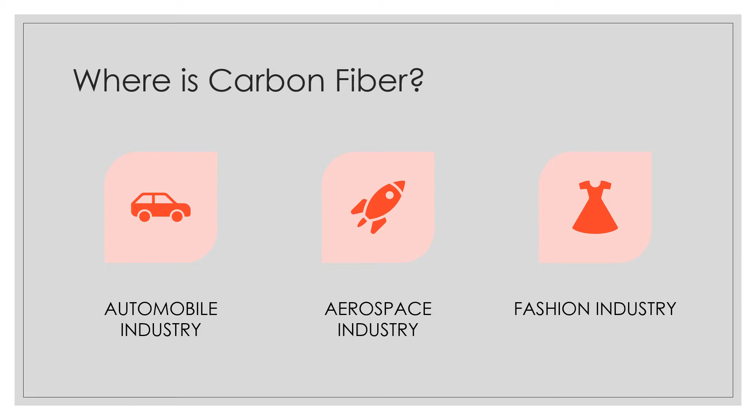Carbon fiber is becoming a major necessity and will continue to grow in value and demand. Knowing more about the creation, economics, and use of carbon fiber is key to understanding the popularity of it. All topics assessed will be important in the upcoming wave of carbon fiber's popularity. Firstly, the history and reasoning behind the use of carbon fiber will be administered.

Shockingly, carbon fiber was first created around 1879 by Thomas Edison, and the reasoning behind the creation of carbon fiber was initially to use the material as a filament in some of his first light bulbs he began to create and experiment with. Although at the time, using it for its tensile strength was not thought of, the fact that it could handle heat and high temperatures very well compared to other materials, as well as its conductivity, made it a point of interest in the future.

It was not really popularized until the 1950s when manufacturers and consumers were looking for a material that could withstand stresses and heat, and ultimately carbon fiber was unmatched at the time. Then the question arose of what was the best way to efficiently and effectively create carbon fiber in order to get it out to the public.

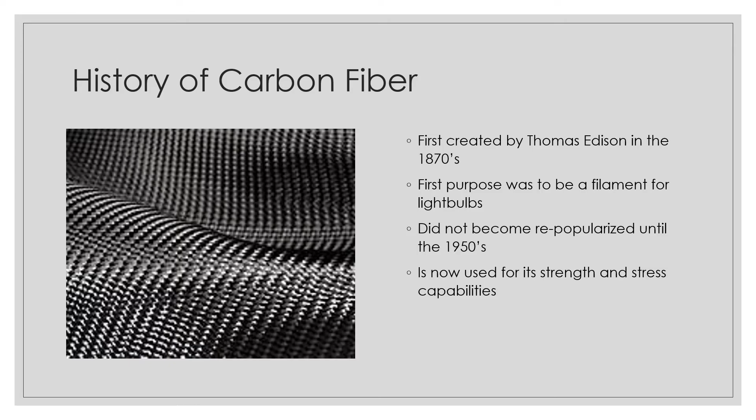To create and produce carbon fiber, thin strands of carbon material are woven together, creating carbon fiber, otherwise known as graphite fiber and/or carbon graphite. Carbon fiber is actually known for strengthening other materials. However, the carbon fibers themselves would have a chemical formula of C–C=C=C–C: C single bond C, double bond C, double bond C, single bond C.

The individual carbon strands are heated together to a high temperature, hot enough to produce vibrations within the individual strands, but not high enough to burn the strands of carbon being heated together. Since carbon fiber would typically melt at 3,652 to 3,697 degrees Celsius, it can withstand the high temperatures needed to separate the carbon atoms without necessarily melting or becoming weak.

The different carbon strands vibrate at violent frequencies to the point where all non-carbon atoms are released, creating a truly all-carbon strand that can further be used to complete the process of creating carbon fiber. After heating and getting all the unwanted atoms out, the strands of pure carbon are then woven together either within different fabric materials or other materials to make the item or object stronger and lasting, depending on the use of the carbon fiber.

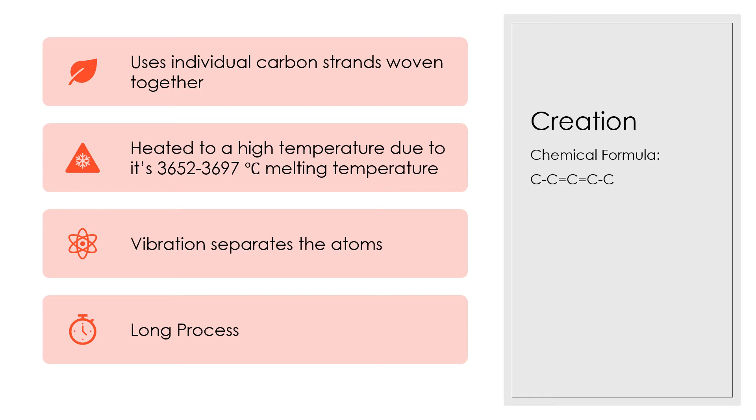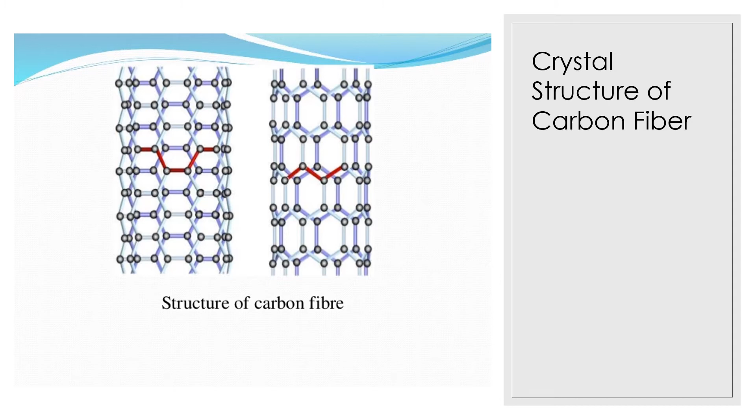Although the process of creating carbon fiber is rather long, this is what drives carbon fiber prices up. Prices also depend on whether the carbon strands are woven in or around another material, which also helps make the carbon fiber stronger. And the strength of carbon fiber is one of its biggest selling points.

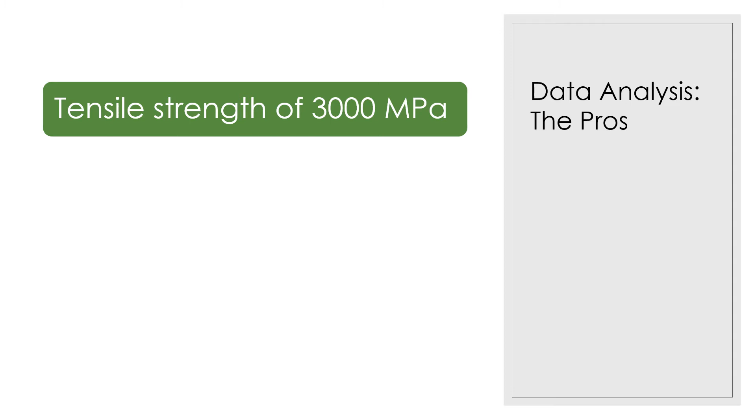One of carbon fiber's biggest selling points and uses is its tensile strength and structure. The way carbon fiber is formed, as explained previously, the carbon strands are strong and the carbon fiber as a whole is even stronger than some metals and steels being used in the current market. Compared to steel, carbon fiber has a tensile strength of 3,000 megapascals, yet the steel is around 1,500 megapascals. And that measure is not even of traditional steels; it is purely carbon-infused steels.

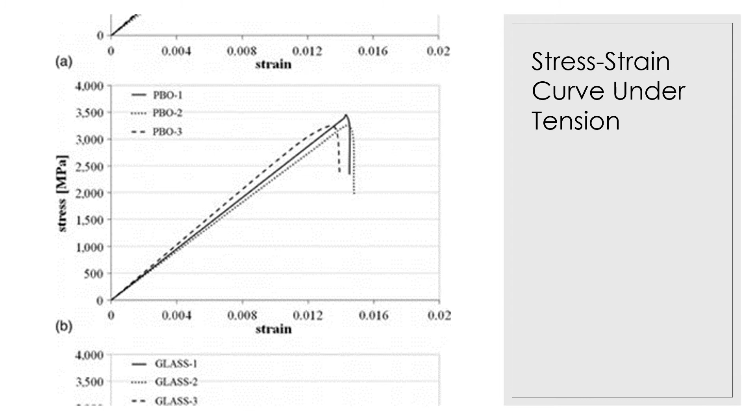The slide currently being viewed is the stress-strain curve under tension. Along with its strength, carbon fiber has a much lower mass than most common metals and steels being used currently in the industry. The density of carbon fiber is 1.5 to 1.7 grams per centimeter cubed, which is almost incomparable to steels with a density of about 7 times that. With a yield strength of 1010 gigapascals, it can withstand a monumental amount of force before fracture.

The sheer strength and weight of carbon fiber creates a huge impact on racing, aircraft, motorbikes, bicycles, marine equipment, etc. With it having such a high tolerance to temperatures, it has lots of thermal properties. The electrical and magnetic properties can depend on the material carbon fiber may be used with.

However, not only can carbon fiber withstand high heat and could potentially possess some electrical and magnetic qualities, carbon can also withstand a bit of elasticity when put under stress. With an elasticity of 228 gigapascals, carbon fiber can get back into shape quite efficiently, effectively having a high ductility value.

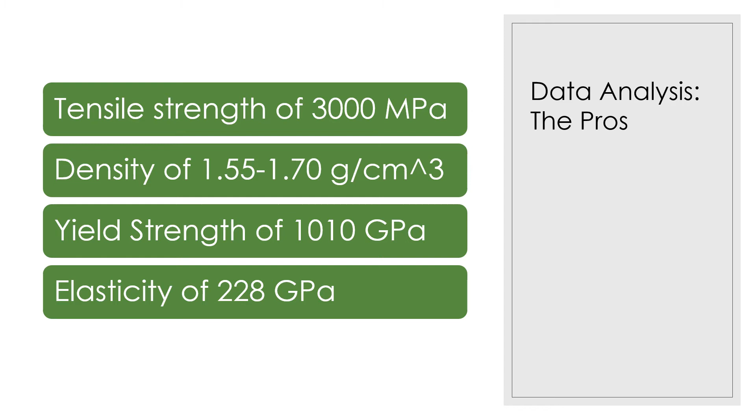Although carbon fiber has its many advantages, there is some downfall. Firstly, being compared to steel and other alloys, carbon fiber has a lower toughness at just 2 on the Mohs scale. Also, with a shear modulus of 4 gigapascals, it remains on the lower end of the spectrum for shear values compared to other alloys.

It is becoming more and more common the more that carbon fiber is being investigated and looked over due to the different types and amounts of strands and types of carbon fiber being created. It will only become stronger, better, and lighter with more time while it is being researched. There will always be a need for carbon fiber, whether it truly does make an impact or not.

This is due to people making carbon fiber more popular and sought after due to its appearance and popularity, which will ultimately make it more desirable to people who are wanting to make a statement or to be seen by peers as more wealthy. Carbon fiber is seen as trendy, fashionable, and luxurious, which is a big reason why people can see carbon fiber being implemented with higher-end vehicles, cosmetics, and other items.

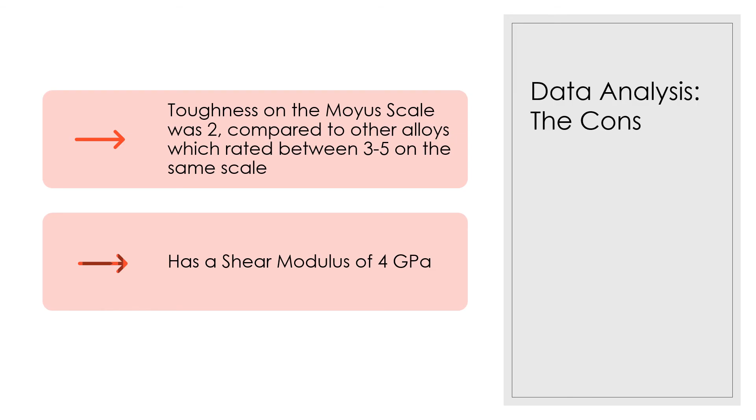Due to the price of carbon fiber along with its many benefits, it is seen as an upper-class item or material and is being made popular with the current day market. Top car brands such as Ferrari, Lamborghini, Maserati, Audi, and various other supercars are infusing carbon fiber into their products and objects, which also adds to the car itself.

Private jets and aircraft can be seen incorporating carbon fiber into their vehicles due to the lightness of carbon fiber, as well as, yet again, the price and need for carbon fiber to make a statement. Yachts and boats often use carbon fiber as well to help with buoyancy and price. As more people find the need and want of carbon fiber, the more it will be seen as a needed item to gain popularity or status in society.

So what does this mean for carbon fiber economically? Ever since carbon fiber has become increasingly popular, the price has dramatically increased. The base price was for minimal profit and mostly was affected by the labor and complexity of making carbon fiber with its different strands. However, as there become more uses and needs for carbon fiber, there is becoming a demand, and with demand comes a price increase. Companies and people everywhere are finding more and more benefits and uses for carbon fiber, so it is obvious why it is becoming more expensive.

Surely the price will level out, but even in the future, carbon fiber will always be sought after and used in every way possible. There will always be a demand for carbon fiber, and the more it gets used in the present day, the more it becomes apparent that it is affecting the economy as well as other aspects of the world. However, as it becomes more used, a waste of carbon fiber begins to present itself. Carbon fiber can be quite expensive, ranging anywhere from $22 to $1,500 per kilogram. However, with all of the previous qualities mentioned, consumers will be more than willing to purchase carbon fiber in the near future.

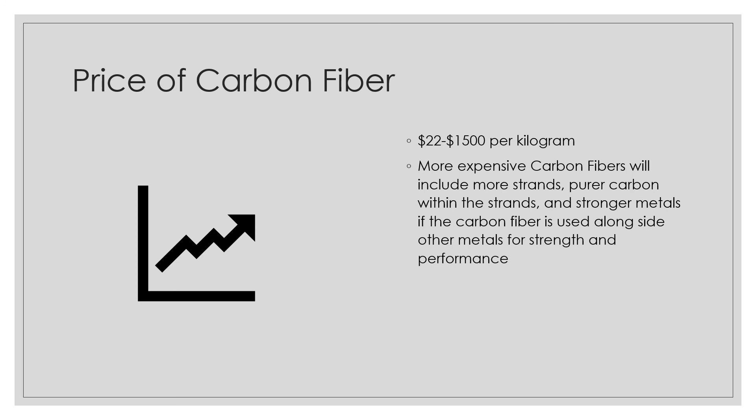As for CO2 and oxygen, there's not much data for the CO2 footprint of carbon fiber, and the possible reason behind this is, firstly, carbon fiber doesn't use too much CO2 for its process, but secondly, there is hardly a truly recyclable process for carbon fiber. However, if the carbon fiber is heated so it can be molded into a new object, CO2 would be needed in order to either create the heat or need to be expelled in order to have more heat to mold the carbon fiber.

As for the water, in the recyclable/reusable process, it is hard to actually find a way water could be used this way. Possibly using water to cool carbon fiber once heated during the creation process is where water is used, and reusing the water by purifying it is a way to recycle the water.

As for recycling carbon fiber itself, it's actually quite hard to recycle. The reason being, you cannot extract the carbon strands from the materials being used or crush/melt carbon fiber in order to make it into a new material. However, carbon fiber can be used for certain chemicals as a tester for different agents or a test object in an experiment. Or the pieces of carbon fiber can be reused into a new material.